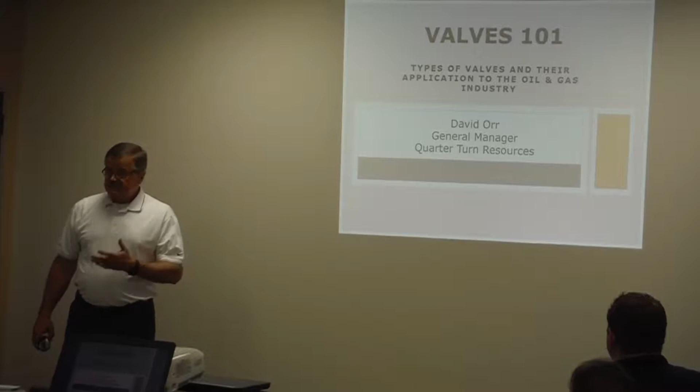So, basic information. I'll run through this fairly quickly, but this will give you a working knowledge of the basics of valves and pipelines, how valves work, and also the nomenclature about valves. So if you talk to people about them, you'll understand what needs to be done. What is a valve? Let's talk about a valve.

A valve is any device that stops, starts, or changes the direction or magnitude of any flow or pressure. I know that's a mouthful, that's an engineering term—some of you in here are engineers. But what it does is, you have a piece of pipe and things that flow through it.

I always like to use the analogy of a garden hose. You turn on your garden hose at home and water is going through there. Well, guess what you have at the end of that water hose? Your little thing you squirt water with—that's a valve. It gives you an idea of something you can control flow with, and that's what we're doing: start, stop, or change the magnitude of the flow.

And how do we do that? Again, with just the closure—the element in there that moves, that actually controls the flow of the media that goes through the valve.

We talk about basics—valves come in pressure classes. Some of you may be familiar with that. We'll start with what we call a class 150. If you see 150 with the little symbol at the end.

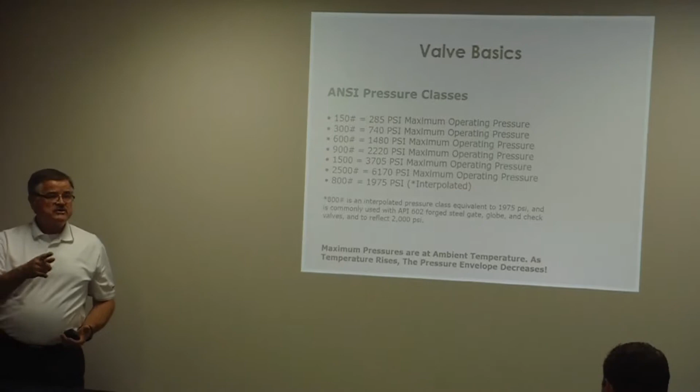Normally you'll see that when people talk about valves. If you read a valve spec or an RFQ, or somebody sends out a valve spec, they'll always tell us the class. What that designates is a standard throughout the industry—not just our valves, this would be anybody's valves. If you see the valve has a class, there's a maximum pressure.

They call it MAOP, maximum allowable operating pressure, that the valve is to be used at and comfortable with. So you've got 150 through 2500 here, and you can see the maximum pressure. I'm not going to bore you reading all this—you guys can read it, I hope.

So, the 800 class, you don't see very much anymore. You'll notice it's interpolated, but there used to also be a class 400. If you ever see out in the field, you may run across some older valves from the 50s and 60s. All of this was pretty much carried forward, and ANSI, the American National Standards Institute, adopted these standards in the 70s.

So you don't see much question about this anymore—most everybody's used to working with this, it's been close to 50 years now. So that's the way it works.

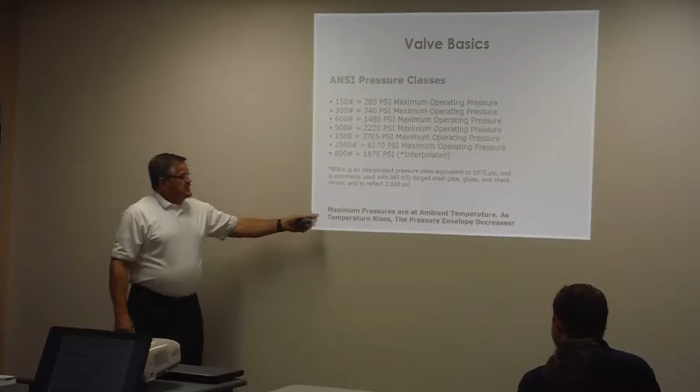But remember too, these pressures are not absolute. These pressures are at what we call ambient temperature. Ambient temperature—anybody know how that's measured? What is it? Anybody remember from your engineering training? The temperature of the environment—correct, the basic temperature of the environment.

We can talk about pretty much what that is: minus 20 to plus 100 is considered to be ambient temperature. That's the temperature of the atmosphere, pretty much.

So if we look at class—let's take class 600, a pretty popular valve pressure that we use in pipelines. When we look at class 600 here and go back to the ambient temperature, you notice the pressure rating is 1480. But what happens when things start to warm up and the valve is exposed to higher temperatures?

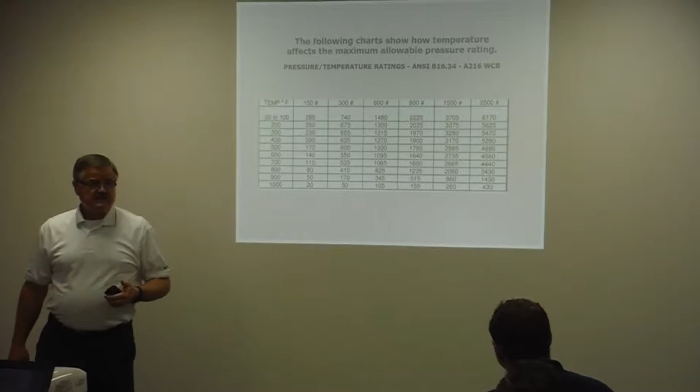If you'll notice, your pressure rating—when we get up to 500 degrees, the pressure rating drops to 1200. Why do you think that is? Anybody? What happens to metal when you heat it up? Right, it starts to get soft—it starts to soften, it loses some of its integrity. Now, it may not be enough to change the structure of it, but it does lose some of its pressure holding capabilities.

If you're ever involved with a situation, this is a lot of times we'll see in pipelines near a compressor station or a pumping station. Because what happens is as the pressure is increased, or the liquid temperature is increased through your pipeline, it runs through the pump, there's heat transfer, and then the media starts to get warm. So you have to take that into consideration. Also inside of a building, if you're somewhere where temperatures may be different. So it's just something to think about.

We've got it for every pressure class. And this is available. I mean, if you take that same 600 class valve and we get it to 1,000 degrees, look how much pressure it can hold.

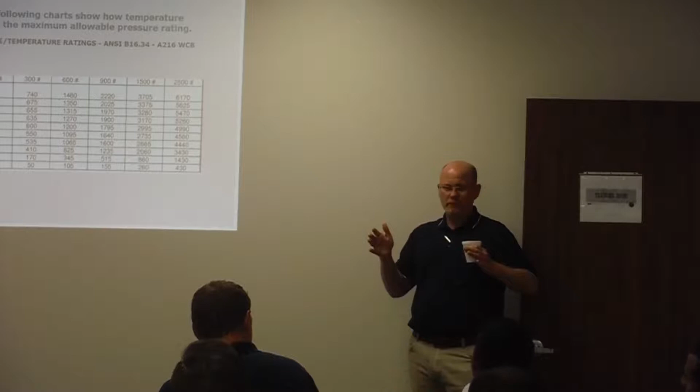Can I ask a question? Just real quick. So, are you all focused on, we talked briefly last week, are you all focused predominantly on pipeline? Oh okay, so you have wellhead. Anybody on the gas side where you deal with processing or anything like that?

Okay, so in gas, one of my nine lives as a valve guy, you get into gas processing and you're going through a mole sieve bed where you're drying the gas to get it to sales grade, put it into those molecular sieve dryers anywhere from 500 to 600 degrees Fahrenheit. Generally ANSI 600 class valves, and you're trying to hold that pressure in, so you isolate that bed so you can dry it out and run more gas.

So yeah, if you aren't exposed to it, talking about ANSI, this may be very rudimentary, but we're talking about ANSI standards here. These classifications of 150, 300, 600, 900, and they're associated with pressures. If you ever get upstream to the wellhead, 6A.

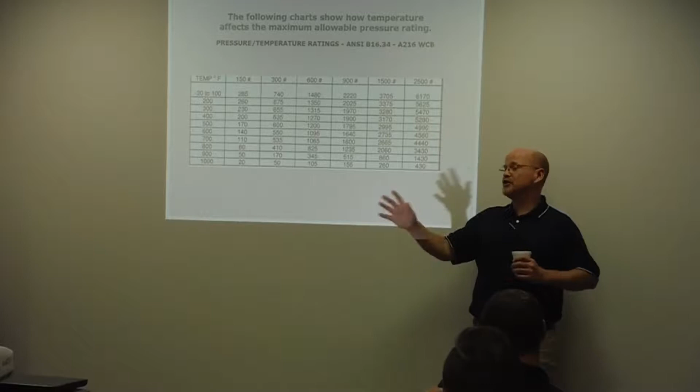You may not be talking about ANSI standards. No, you're talking about 6A pressure, 6A standard, and that's much easier in the sense, not easier to do, but in the sense that a 10,000-pound valve is going to hold how much pressure.

It's pretty simple. This is just a little bit more confusing, but so I understand exactly what we're doing, and that's why I would ask the question of where you're all from. Are you just pipeline? But even after this, if you go into a different area, this expands, but the 6A has the 2,000, 3,000, 5,000, 10,000, 15,000. So there are different standards.

Go ahead. Right, so again, just to make a reference to your kind of standards, so according to the pressure class, you mentioned like a regeneration there. At 600 degrees. So is there a correlation between temperature and pressure? Because at 600 degrees, higher temperature, if you're using like a 600 class pound ANSI valve, what's the correlation there between temperature and pressure?

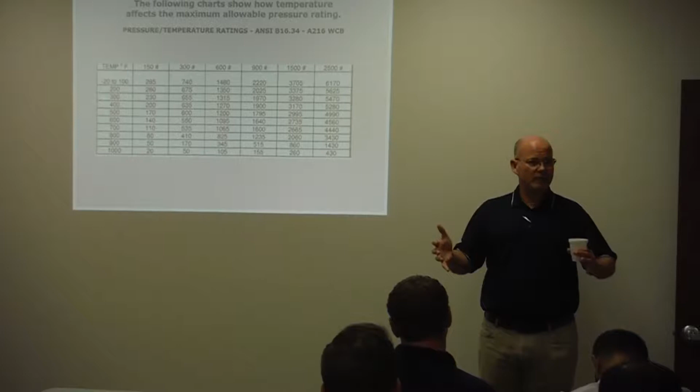Well, obviously, it's going to be the same correlation in the sense that if you use an ANSI 600 class valve in a dryer application that's rated, your maximum temperature in your dryer beds is, let's say, 600 Fahrenheit, your pressures through that dryer bed are going to have to be much lower. You're going to have to manage your pressures knowing that your temperature is at that rate. You're going to have to manage that knowing that your equipment is limited to this, right? Here's your box you have to live in. If you want to dry it at a higher temperature or a higher pressure, then you size that up and you put that dryer bed in an ANSI 900 class, which is not uncommon.

You know, the most common is 600 class, but you manage the equipment according to what your end results are. I don't know if that answered your question or not, but the pressure-temperature, we don't change the laws of physics, we just work around them. In the sense that you know that at 600 degrees Fahrenheit, a 600 class valve is at 1,095, that's your box you have to live in. Now, if you want to go to a higher temperature and it doesn't contain it, you size it up to 900 class.

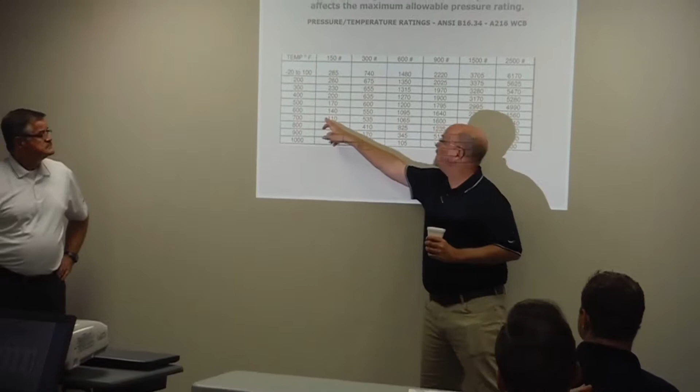Okay, and one of the things they're speaking to, you notice the pound sign behind each one of them. That's how you see it written, that's how they refer to the ANSI class valve. So the temperature at 600 degrees Fahrenheit, if you want to run higher pressures, there's your 900, max temperature at 600 degrees Fahrenheit.

He was talking more about the 6A valves and the correlation scale between 6A and ANSI. On the 6A valves, when you use a 10,000 6A valve and go to higher temps, you're already close to the limit. Do you therefore step that one up to the 15,000? It's going to be the same correlation. We don't change the laws of physics.

The metals are the same in a lot of cases, or you go to a different one. What determines that is the metals that are in there, and of course they also have ANSI flanges in a 600 class, 20-inch flange. You see this right here? This is what he's talking about. This is predicated on this line: ANSI B16.34 WCB. WCC will be a little bit different.

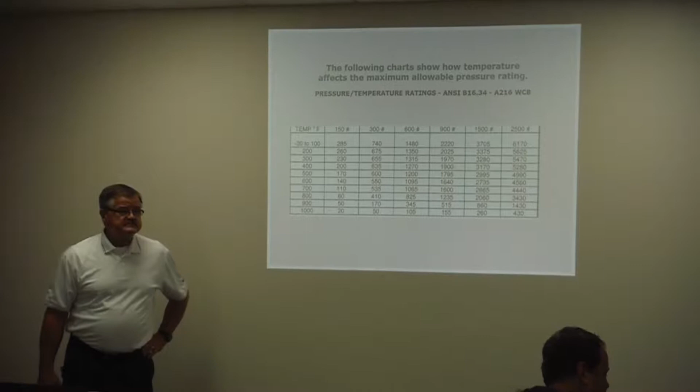If you use a stainless, this is going to change. If you use a super duplex, this is going to change. If you use a polyurethane valve, it's going to change. So are you talking about just the material of the ball itself? No, just the body, the pressure body, the pressure containing vessel. But that's your key, just one.

The 600 class, everybody refers to it as 600 class. When you're exchanging data with people, oftentimes that gets confused. Somebody will say, well, I've got 600 pounds, and then it starts sounding like that's your operating pressure, your media pressure inside. So when you're referring to this stuff, refer to the class, not necessarily the pound. ANSI standard, American National Standards Institute, B16.34 — this is your standard, and this is in the industry. So if you buy a 600-pound class valve from us or from anybody else, they're all the same standard.

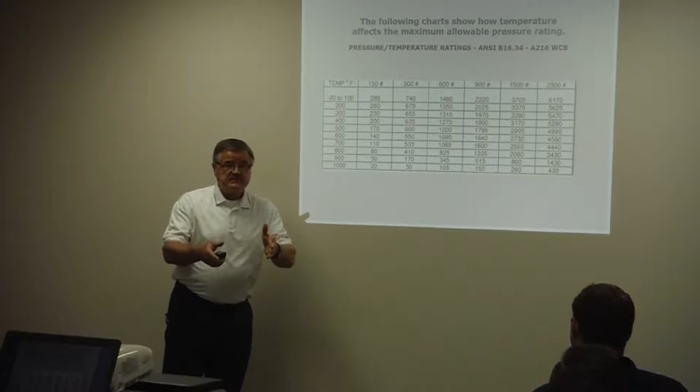The industry decided in the 70s to standardize on this, but you move into a different valve with different material. The WCB is steel, which would be a standard valve range here. The WCC would be a low temperature, probably go to -50, but then your maximum pressure rating is also derated. So pay attention to the specifications on the valve, but it depends on your project and your application. That's your key for doing it that way. Any other questions? Everybody good with that?

Okay, moving forward, let's talk about castings. We're going to talk about the two basic components of valves: one is casting, the second is forgings. Castings are very simple — what you do is take scrap metal, recycled metal or other types of metal, melt it, and pour it into a form, which allows the material to take the shape you particularly want.

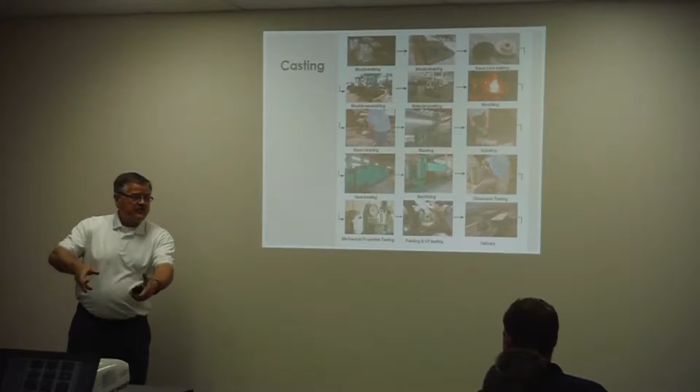They'll show what they call a core or a mold at the top center, then they put the molds together, melt the material, and pour it in. After it comes out, they clean it, blast it, grind it, heat treat it, machine it, do whatever, and check it to make sure everything's done. So that's a casting, and it's an inexpensive way to make valves, quite frankly. Castings have been around for probably over 700 or 800 years — if you've ever seen the old movies where they're making swords, they'll pour the molten material into an open type form, and it takes that shape.

Castings have been around forever. They have the advantage of being less expensive, but there's two issues with castings: number one is brittleness, and number two is porosity, which means the media inside can get out in particular cases. Now you can fix that, but if I lay a casting on the floor and hit it hard enough with a big enough hammer, it'll crack, maybe even break. So that's one of the downsides — depending on your application, there's a certain amount of brittleness. But they're a less expensive way to make valves, and every valve manufacturer uses castings in one form or another to make valves.

We talk about forgings, and this shows a press and shows this molten piece of material that's held in there. I'll give you guys the easiest example of a forging.

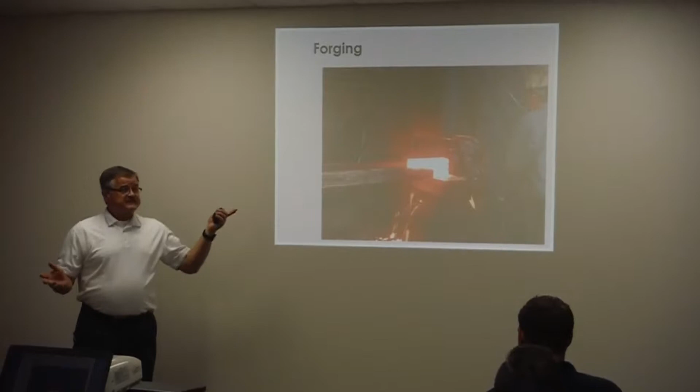How many of you have ever seen in person or seen in a movie how they make horseshoes? Stick them in the fire, get them cherry red, lay them on the anvil, and take a hammer. Whang, whang, whang. That's how they're making horseshoes. Quite frankly, it's a very simple way to talk about forging. That's how forgings are made.

The material gets into a semi-liquid state. It's melted to where it can be shaped, kind of like putty. And then it's usually pounded into a form or into a particular shape. They use presses, sometimes hydraulic, sometimes what they call hammers. They bring a ram up to the top and release it, and it goes bam! If you've ever been into a forging shop, they're hot, noisy, and something else to look at.

But this is an example of a forging. The plus side to a forging, think about what I said about casting. As material pours into a mold, it finds the spots to fill in. The molecules, when they cool, randomly line up. Within the material, if you can see it under a microscope, the grain kind of runs in all different directions. What happens is that you don't get a toughness. That's why they're brittle; they'll break because the molecules do not bond and form in what we call a very hard or tough form.

Secondly, when these molecules line up, if you have some type of impurity in there, grains of sand or whatever else, that also sets in there and the material doesn't fill that in, and then you have a little hole that goes through there. Some of you may have been involved where you actually see a casting that'll actually leak through the body.

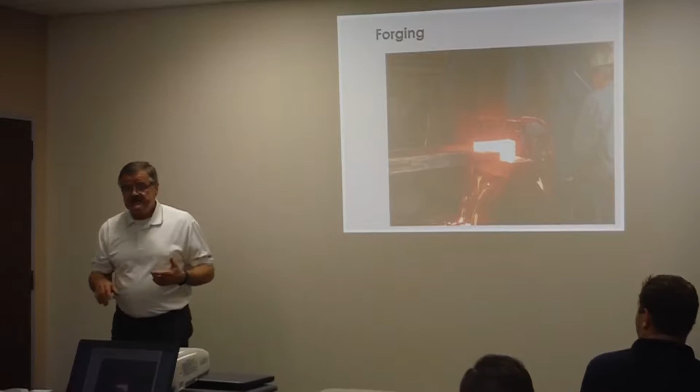Sometimes that happens. We can repair that, we weld it, but it's an issue that goes out there. Forgings, what happens is when you're applying pressure to the material, it forces the molecules to line up in a particular direction. They bond more securely. You don't find leaks through the bodies of forged valves. It just doesn't do that because the pressure requires every bit of that void inside the material to fill in.

That's why today on most pipelines, especially natural gas, the requirement for interstate pipelines - and this is by the Department of Transportation - is for forged valves. They want that extra level of assurance in keeping that material inside the pipeline.

So that's the difference between castings and forgings. Castings are cheaper, but we talk about porosity and brittleness. Forgings cost more because I've got to heat the material, I've got to have other equipment to beat it up, you know, form and shape it. But we don't have porosity and no brittle issues. So that's a lot of times the difference between forgings and castings. Questions on that? Run through that fairly quickly.

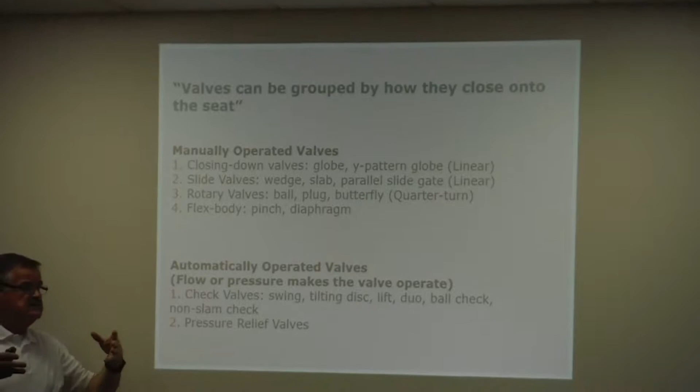Let's talk about groups of how valves are grouped by how they close on the seat. The seat is the sealing area of the valve. So we have two different kinds of valves. We have what are called manually operated valves - some type of outside influence, whether it's a hand or an operator that's put on the valve or a signal sent to the operator, something tells that valve to open and close. And then we have automatically operated valves, which are valves that don't require human intervention to actually open and close.

Manually, we've got globe valves, Y-pattern, and slide valves - wedge, slab, parallel slide gates. Kevin's going to talk about your wedge and gate valves today. Rotary valves - ball valves, plug valves, butterfly valves - and the flex body, which is normally used in valves that are for media that has a lot of solids in it. I've sold those actually to people in gravel pits when they wash gravel. So those things happen, but we don't normally deal with that in our particular industry.

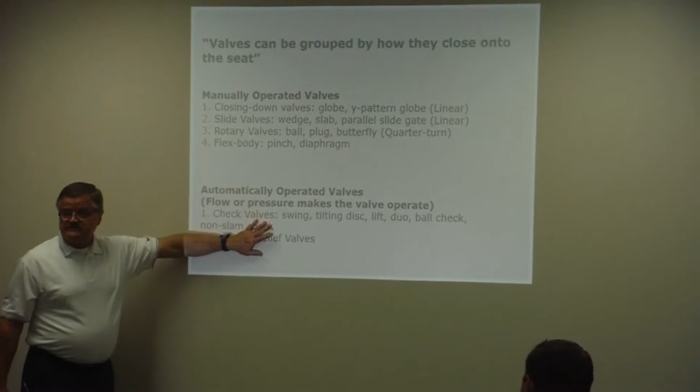Automatic valves, or check valves - swing, tilting disc, ball check, non-slam - and the biggest one that you see is pressure relief valves. They don't require human intervention to work. They're designed to work automatically. So again, manual valves, automatic valves. Question? All right, moving on.

A CV factor - everybody know what CV factor is? Yes, no? Okay, CV - engineering terms, coefficient of volume. Amount of gallons per minute of water, that's how a valve is rated, by water flow, flowing past the valve, required to create enough friction to lose 1 psi of pressure, which means pressure drop.

Easy way to remember that is remember your squirter on the end of your garden hose? If you take that off, guess what you got? Turn the spigot on, you got a full flow of water, right? You put that spigot back on there, and then you're moving your handle or twisting something.

What you're doing is you're creating what's called a pressure drop. How many of you have ever had the opportunity, especially guys, washing a car and you couldn't find your thing that goes on the end of the hose, so you put a kink in the hose and hold it, right? What happens when you first start to open that? You get a lot of high pressure, right? And as you open that hose up, your pressure drops, but your volume increases.

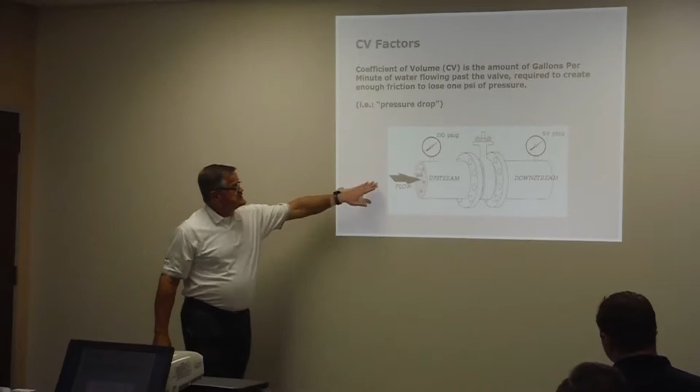That's a restriction. So what we want to do is we have flow here into a valve. This is representative of a butterfly valve. Anything that's in that flow path is going to slow down that flow through there. So what you measure is what we call pressure drop. You gauge here, and through your closure element, you see how much pressure drop you have there.

We'll talk more about how that applies in valves, but CV factor. If I have a valve, let's take this ball valve here. That's why we brought this, easy to show. You can see through this ball valve, and this is the same diameter as a pipe, right? So how much CV drop do I have through this valve when it's fully open? Anybody guess? What's my pressure drop on this valve?

There's none, technically speaking, because when the valve's completely open... of course when I partially close the valve, now I'm creating a pressure drop. I'm restricting flow. So what would be the CV factor on this valve when it's fully open? Anybody want to guess? Come on, remember your basic math. Virtually none. It's called 1. A perfect CV factor, where there's no restriction of flow and no pressure drop, is a CV factor of 1.

Once I start to close this valve, now my CV factor may be 0.85, 0.80. So again, CV factor is critical, because if you're designing or working within a pipeline, you've got to put product in the front end of that pipeline, and you've got to be able to tell people what's going to come out the back end of that pipe. If I have a full open valve, the same pressure I put in, the product should be the same I get out.

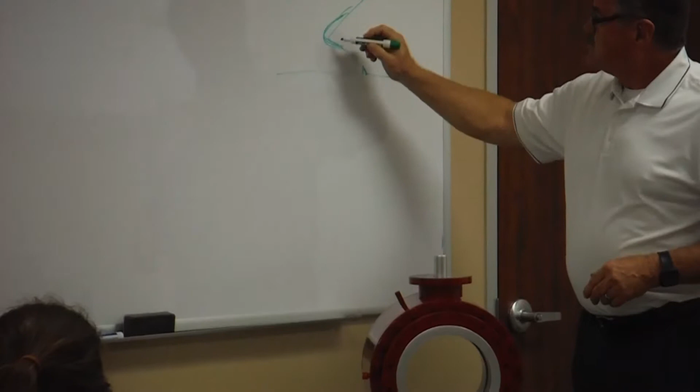Because remember, when you look at your profile through your pipeline - here's a little bit, this is your pipeline - because of your friction here, your flow profile looks like this going through a pipeline with liquids, right? That's what you got to do. So when you measure flow in a pipeline and talk about your valves, where are you going to measure? You're not going to measure your flow here at the wall. You're going to measure your flow in the center. Okay, basic to cover with that, but that's just basic engineering.

So we talk about CV factor and how that CV factor works. It's critical when you're doing calculations, and also with valves, because we have valves that are like this - this is called a full open valve. But you can also buy valves where the port through the ball in the center of the valve is actually smaller, then you create your own pressure drop. In certain valves, we'll talk about plug valves today - plug valves have a smaller opening through the valve than the pipe itself, so it creates this CV factor and pressure drop.

So, the terms for that - that's a full port. This is a full port or full open valve. If you have a reduced port, that's when the hole through the ball is actually smaller than the inlet and outlet side of the valve here. Okay?

Uncommon types of valves. And this is a little bit of a misnomer. Gates and globes. We don't see too many globes, quite frankly, especially in pipelines. We do see gates, but gates is more liquids. I had designed this basically for gas, so my apology for that. We will talk about gate valves. The gate valves will be more into your liquid side.

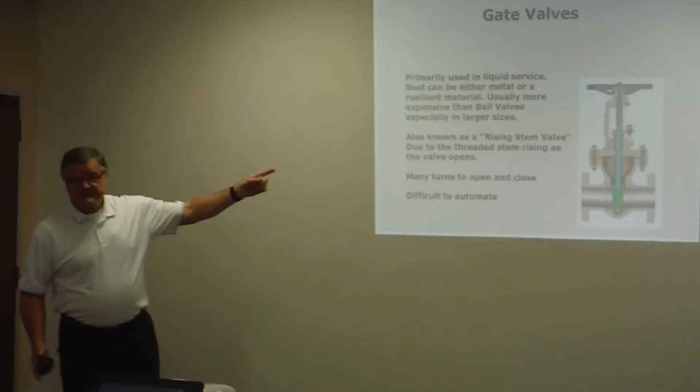Okay, so uncommon. A gate valve, again, liquid service. The seat can be metal or resilient material. Usually more expensive than a ball valve, especially in the larger diameters. But sometimes that's what you use. Rising stem valve. I'll show you in another valve, another situation. This is the oldest design valve in history. We'll talk about that in just a few minutes.

Rising stem valve, threaded stem. A lot of times your old manual valves had a hand wheel on like this out in the field. If you rode by it, you could see the valve. You see a bunch of threaded stems sticking up out of the top of the handle. Usually meant the valve was open, because as you screw that handle, it pulls the gate up out of the valve.

If you went by and saw just a little bit of the threaded rod on top of that valve, usually meant the gate was closed. So a lot of times you can visually see those. Many turns open and closed. Sometimes they can be difficult to automate, mostly with electric actuators to do that.

A bolted bonnet globe valve. These are also used somewhat in liquid service. You may see these. Are you familiar with the faucet on the outside of your house where you turn the water off and on? That's what that is, believe it or not. Your material flows in this way. This is a resiliency or an O-ring.

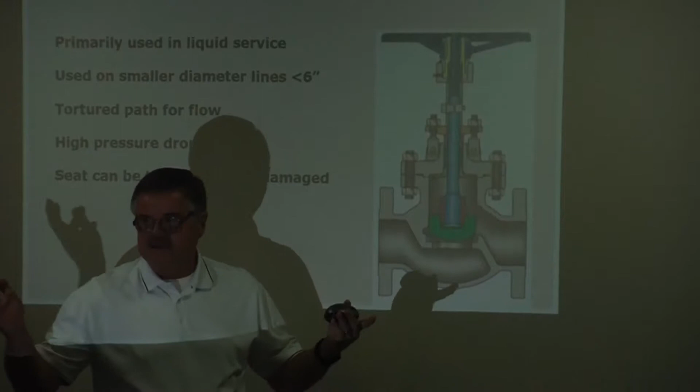And what happens is you turn your spigot on the side. I'm sorry, I call it spigot. But you pull that. What you do is you pull this off, so your liquid starts to flow past the seat and then flow out of the valve. And when you look at your faucet on the outside of your house, that's what you have. This is also usually your kitchen faucet, especially if they had the old type. They had the two handles, one for hot water, one for cold.

What you have is basic design. This valve design has been around for over 200 years. Pretty basic too. The downside to this a lot of times is you continue to lock down the seat. Whatever this material is usually takes what we call a set. It starts to form into the seat. And then it starts to take a set, and you have to keep cranking it down a little tighter and a little tighter. And eventually your seat gets to the point it won't seal anymore, and then you got to replace it, or you got to replace the valve. But it's a pretty common valve with that.

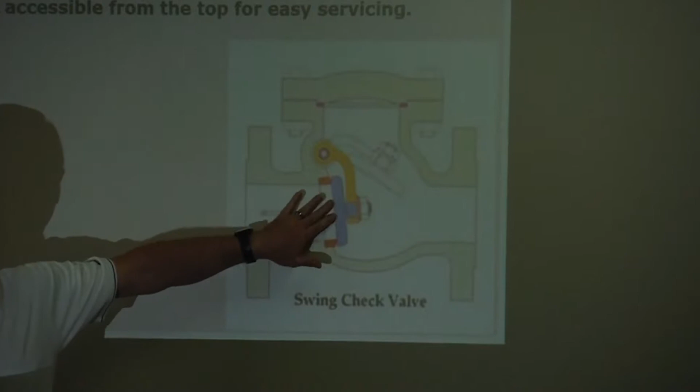Okay. Swing checks. We see a lot of these with what's going on out here. With what we deal with, it's normally 2-inch to 36-inch in the API sizes, all the way up to class 600s. The nice thing about this particular check valve, this is your flow, and it has what we call a clapper right here. So as your flow goes in, if this flapper is at a slight angle, it pushes this flapper up and allows your flow to go through the valve. Well, what happens when the flow reverses? Your clapper comes down and closes off, and your material can only go one way.

Pipelines, especially around pumping stations or compressor stations, real critical. If you have a pump that pumps things out one way, you don't want the material to start pushing that pump back the other way. That's how things get damaged. So what we do with the check valve is it's called a directional valve. It's a one-way flow. So you see those in pipelines quite a bit, whether it's gas or liquids. That'll actually come in when I talk later. There are directional valves, and

the standards by which to manufacture a valve are the API and ANSI standards. You know, it has to be this thick, the face has to be this long. Directional valves will have an arrow on them. I know, I say that and it seems rudimentary. You'd be surprised how many times I went out there and they put check valves in the wrong direction.

Sometimes we get up on the wrong side of the bed and we're not thinking when we do something.

But when I talk about our valves, there are directional valves where it is only one direction. There's also a term called bidirectional. We'll cover that in a minute. But there's also a thing called preferred pressure direction, and we'll explain that as well, okay? But there's a clear delineation. It's kind of like we were talking about a minute ago.

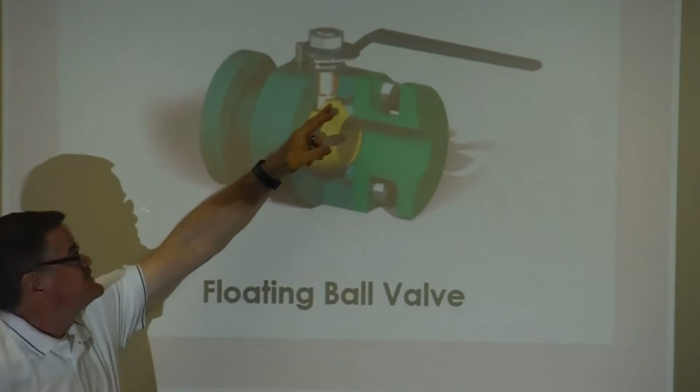Gas side, but also liquids, you see a lot of ball valves. And this is a ball valve. In basic design, there's two types. First and foremost is what's called a floating ball valve. Usually this is smaller diameters, and the reason they call them floating is that there's a groove in the top of this, which attaches to the valve stem, but there's nothing on the bottom.

The seats you see here and here are fixed in the valve. So when you close that valve, the ball actually travels a slight distance and is pushed into the seat to create the seal. So the ball actually floats back and forth between the seats. Seats being fixed, the ball moves. Okay? That's a standard, and everybody calls them floating ball valves.

You normally see these in small diameters, 2, 3, and 4 inch. It's rare you see much bigger than that, and you rarely see them above 300 class. You get to 600 class and larger, you don't see floating ball valves. People just don't use them. But they're inexpensive. They're pretty cheap to make because the tolerances to allow for the seats are pretty wide open. Pretty easy to seal off the valve. So a lot of people use them in lower pressure, smaller pipe diameters.

The trunnion mounted ball valve is one of the preferreds in the pipeline. This is a trunnion mounted ball valve. We have a cutaway on this side of the valve. It's very simple to see. Well, take it apart and see it. It's a lot easier to do it that way. There is a bearing block and a bearing block, and we'll see one of these today on our plant tour. We've got one taken apart so you can see it in more detail.

But what happens is that instead of this ball floating around inside there, the ball is contained between the top and bottom trunnion mount. There's a hole through each one of these in a way that the ball is trapped. So the ball can never move. The ball pivots on an axis. If you draw a straight line from the bottom to the top of this valve in the center, the ball pivots on the axis.

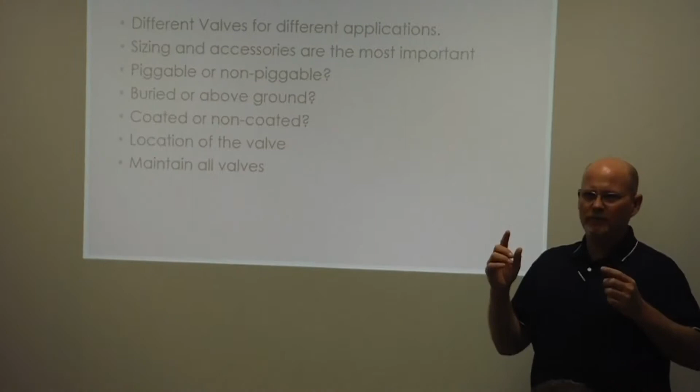The difference in the floating ball valve and the trunnion ball valve: in a floating ball valve, if you have that mass of metal, it's difficult to turn, but then you close it and add pressure at 600 psi, and you're trying to break that ball off of that seat, it becomes cost prohibitive. You can't buy a gear big enough, or an operator big enough, or you don't want to pay for it, because there's so much pressure driving the ball into the downstream seat, because it's floating. And the way you're going to learn is when you have been exposed to someone making a bad decision.

I learned the difference in trunnion and floating ball valves. I was part of a group that started our own company many years ago, and this is how I learned. We sold our first valve to Enbridge. It was in a gas processing facility, and we were putting an actuator on a 6-inch 600 valve. The reason I'm familiar with molecular sieve drying is because that's my background. Started many years ago with a little company called Orbit. Spent about 18 years with them. They kind of own that world.

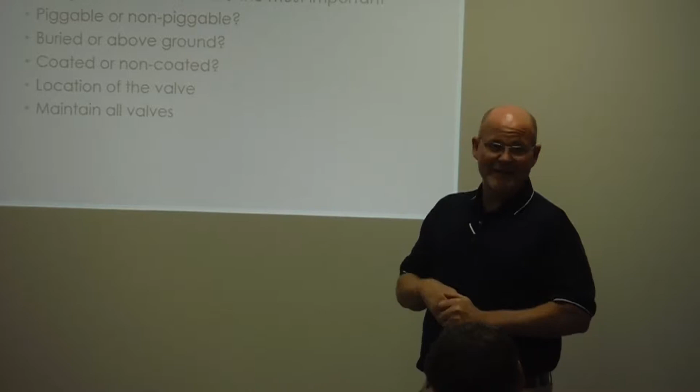But we were building a competitive valve, and this 6-inch 600 and a floating, I was very familiar with what our torques were, and I put this together, and the engineer goes, well, probably want to do this, that, and the other. And I said, no, this will work, right? So we put that in there, and we added pressure, couldn't operate the valve. I screwed up, right? Went back to my design engineer, and he said, well, we need to make that a trunnion.

The difference in the foot-pounds of torque required to turn a full-ported 6-inch 600, in this instance. This is not across the board, but it's a good example. 6-inch 600 floater, full-port at 600 degrees Fahrenheit, 1,000 psi, give or take, versus a trunnion. This was a third of the torque required, literally. So your actuator sizing went from 4 Dodge trucks to a Miata. Put the valve in, worked beautifully, they started using them. But that's the advantage: mass is one thing, but when you add pressure, it's a whole different ballgame. So, sorry.

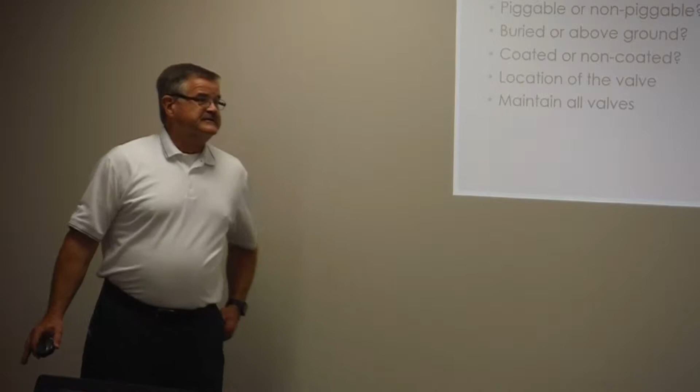All right. So again, as I said in my earlier statement, floating ball valves you normally see in lower pressures and smaller sizes. Trunnions, larger valves, higher pressures. Quite frankly, I don't know that I have ever seen an actual in-operation 600 class floating ball valve. It's rare. But in your world, yeah. We come from different worlds. You go into a power plant, it's got 30s and 36 inch, and they can't take them out.

Anyway, there's a couple of customers who have some old Rockwell-built 30 and 36 inch 600 class floating ball valves, and they have the largest actuators in the world to turn them, because they're operating up at about 800 psi. There's so much pressure on these things, and they want to get them out, but they're critical valves. They have to shut their system down to do it. Tell them good luck trying to find a replacement exactly like that.

Look, I try not to be one of those who says it's never gonna happen, right? In every industry there are exceptions, and there are companies out there that only build floating ball valves up to 2500 class because of the application, because you can't build a metal seated trunnion ball valve to get the seal that you need in severe service. There are companies like Mogas and ValvTechnologies, and these people cut their teeth on that. What we do is simple. These people are running rocks and steam, so there's exceptions to every rule.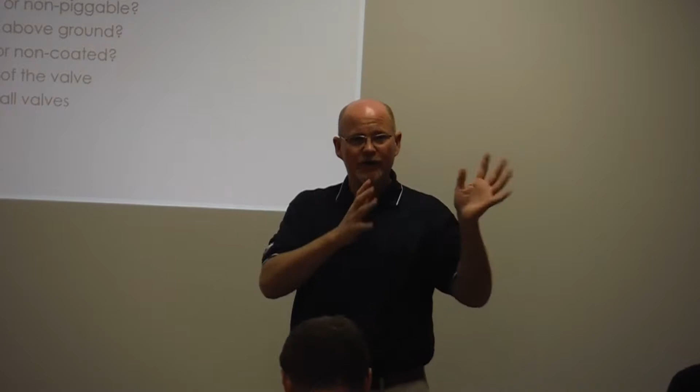There are small niches in this industry, and yes, there are big metal-seated floating ball valves, but in that industry, you can't do what they do with their design with ours. Ours is soft seat, resilient seated. It's designed for up to 250 degrees Fahrenheit. These things go to 1400 F.

It's different. There are exceptions to every rule, but they're out there. In our world, your current world, that's a general guideline. What David is saying is right. Most of your floating ball valves are lower pressure, smaller diameter. It's more advantageous for you to look at a trend, and then you get to a certain size, certain pressure.

So if you use a trunnion ball valve for isolation, for instance, is there a kind of requirement for a minimum differential pressure, like if you want to go by the size? Because on one end there's zero pressure because you're using it for isolation, and on the other end there's energy. So is there like a required differential pressure, or can you just slowly open that valve?

Going back to size - in a trunnion ball valve, depending on your seating systems, the differential pressure isn't that critical. The valve will operate, right? It's going to open once you get enough energy on top of the actuator.

The issues with opening against a high differential, especially in a resilient seated valve, is what's it going to do to your seating area? So I may not understand your question, but in terms of opening that valve under that differential - that's going to be a policy you set internally. Will the valve operate under it? Sure. But there are considerations.

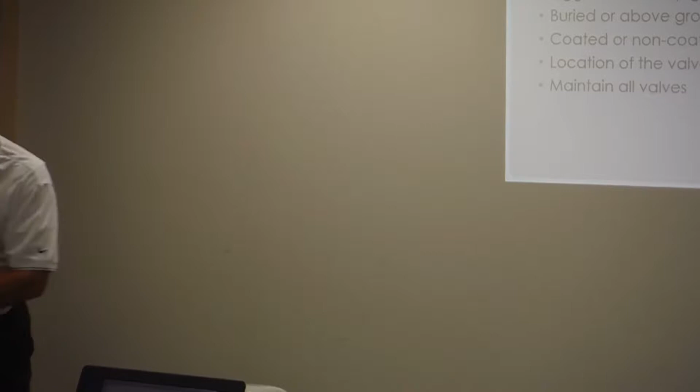Because the longer you sit there with that valve partially open - what happens again when you partially open this valve, imagine when it's fully open, this entire seating area is behind the ball, because the ball covers the entire seating arrangement. But if you open the valve partially, say if the ball is here and it starts to open here, this is the area that's exposed in the downstream seat - what happens is that rush of material starts to eat away and erode the seat.

And the more you do that at, say, 3 o'clock, that area is going to be sacrificial - right there on that face of that seat. That's where I was getting at - it's a sacrificial element, that's inherent in the design. That happens with what's called erosion in our nomenclature - it erodes away the seat, because whatever material you're flowing through there, whether it's a gas or liquid or anything, there's a certain amount of abrasion that happens with that seat being exposed.

So that's why in a lot of what we call control valves, where they modulate it and keep the pressure or volume at a particular flow rate, sometimes you won't find a resilient seat. You may find a harder seat, a metal seat or something that can handle that better, at a quicker or lower flow rate. But in your situation, I'd recommend going from full close to full open as quickly and as safely as possible, because you want to minimize how that seat is exposed to the flow stream. Does that make sense? That's the easiest way to do that.

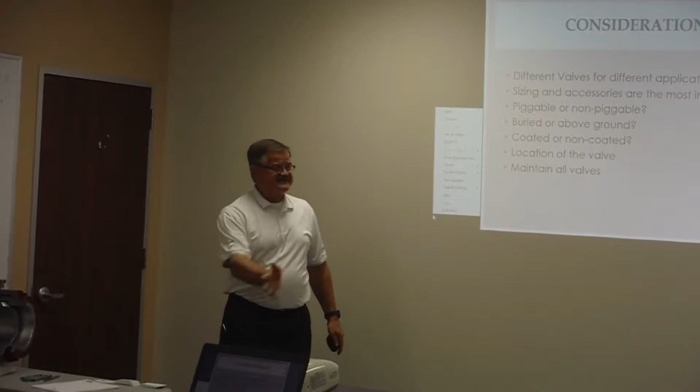Everybody know what pigging means? Okay, I have a question about pigging I've never gotten a right answer to. Do they call it a pig because it gets nasty, or because of the noise it makes going through the pipeline—because it squeaks? Yeah, noise. If you've ever been near a pipeline you hear them squeal as they go by, the scrapers catching everything. I thought it might have been because they got so nasty looking.

Is the valve for buried service, because a lot of pipelines are buried, or is it above ground? That's a consideration too, we'll talk about that later. Coated or non-coated is the finish on the outside of the valve—if you're going to bury it, you've got to have a certain coating. If it's above ground, I'll ride by, and if it looks rough we'll go blast the paint off and repaint it, make it pretty again. So that's a consideration: where's the valve located? Is it in a remote area five miles from the nearest power source, or inside a building at a compressor station? It makes a difference on the application of the valve.

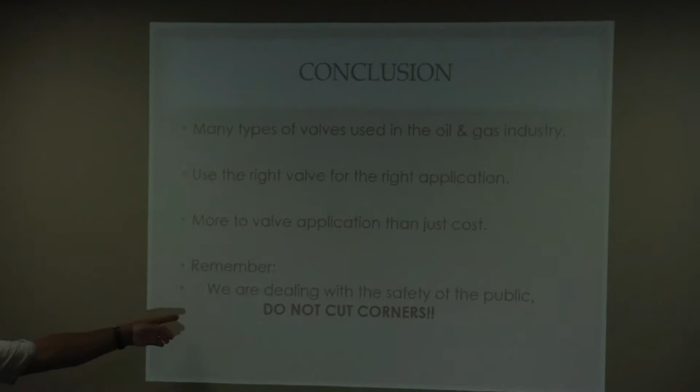Bottom line: maintain all your valves. Make sure you get the best life and service out of any valve by maintaining it, okay? Many types of valves are used in oil and gas—use the right one. There's more to valve application than just cost. And at the end of the day, we're dealing with public safety here, guys. We don't cut corners, period.

I could talk about San Bruno, for any of you who've heard of that out in California, or the wildfires last year in California. The one example I can give you quickly: I was working for another valve company and got a phone call about 6 a.m. one morning. This happened in eastern Tennessee—East Tennessee Natural Gas had a compressor station, and at about 6 a.m. an F2 tornado went right through the middle of it. It cut a path about 100 yards wide right through the center of the compressor station. You can imagine what that looked like. They were calling us saying, how do we shut this thing down? They had to go find a valve three miles upstream from the compressor plant. It wasn't automated—a guy had to go out there with a gear operator on top of that valve, and 220 turns later he got the gas shut off. But it happens, and again, we can't control weather and nature. But again, safety, okay?

Again, that was Valve 101 where we just talked about basic things. Any questions? I do have one.

Typically we use forged valves a lot in natural gas. Forged valves—is that a requirement? Yes, pretty much, in interstate pipelines. So what's the largest size coming in, or maybe it's small sizes now? In the United States there's a very, very small section of 48-inch valves. The majority of pipelines in the United States are either 24-inch to 42-inch—that's pretty standard. You'll see a little bit of 20-inch, most of that being laterals that go off the main pipeline and feed other areas. But 24 through 42 is probably 97% of pipelines in the U.S. There's a very small part larger, in the 48-inch range, but I doubt there's even a few hundred miles of it.

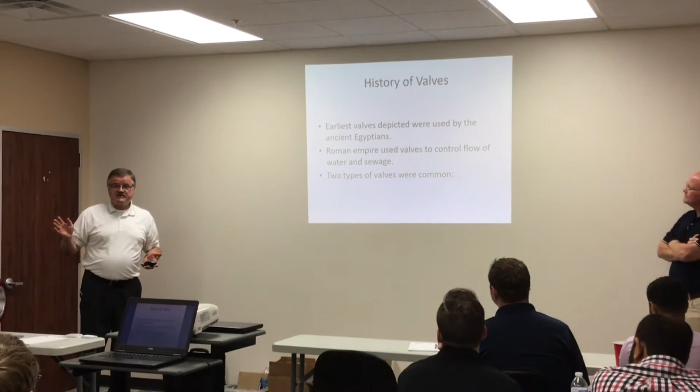The earliest valves depicted were used by the ancient Egyptians. Did you know that? Just because today we have modern technology, cell phones and computers, doesn't mean we're always the smartest people in the world. Valves have been around a long time. The Romans used valves to control the flow of water and sewage. The first one was a gate valve—they used to put these in fields coming off the river, digging a trench and putting in what they call a sluice gate valve, so they could open and close it to water their fields. This has been depicted almost 4,000 years ago.

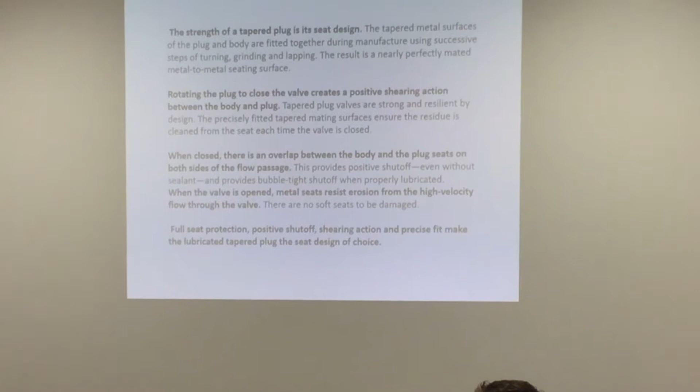Again, this is a lot of nomenclature out of a catalog, but it talks about tapered plug. You have a tapered plug that goes inside a tapered body. The more pressure you push down on that, the tighter the seal becomes. Rotating the plug creates a shearing action which cuts off your flow completely. There's overlap between the plug and the plug seat, so you get seat protection and positive shut off.

Okay, a lot of this is sales talk, I'm going to move through this fairly quickly. If you want a copy of this or need more detail, if you're dealing in plug valves, let me know and we'll deal with that. Basic construction: tapered plug, tapered body. The deeper this plug pushes into the body, the tighter it fits, the tighter your seal. That's how that particular plug valve works.

In the 1950s, because of higher pressures throughout the oil and gas industry, they decided to take the plug away from the stem and invert it, turn it over, so the taper now runs the other way. That handled the higher pressures and allowed the plug to turn more freely inside the valve. So today that's your pretty standard design, a pressure balanced design. It reduces the torque and works better for applications today.

A pressure balanced plug is installed with high pressure drop. You might say, where are these commonly used? Two applications that you see plug valves being used on today, and you'll use the second one in your liquid lines. The first one is called blowdown. Now you don't blow down liquid pipelines, that doesn't work, but in natural gas pipelines you can do that.

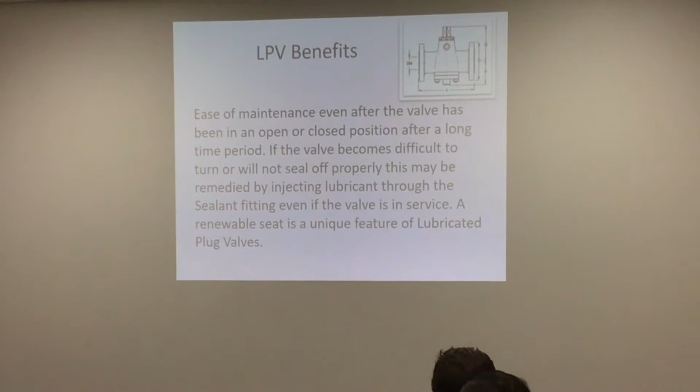We talked about the way we balance the plug, top and bottom, so that we keep the torque down on the valve. Liquid, what do they do? Their maintenance, they can be serviced in line. You can inject a sealant into the valve, usually with a high pressure grease gun or a NAT gun. That's how you put sealant inside the valve to do that.

Okay, valve sealants - I'll run through this fairly quickly. You use different sealants for different applications. They're a lot used in oil and gas. When I sold plug valves at Nordstrom, we actually had a sealant that was food grade - you could eat it. But it was designed for applications where they used pure water or other things like that. So again, right valve, right application. For plug valves, lubricated plug valves with the right sealant to fit the application - that's the key for that.

Many of those are made. Sealant fittings are designed to maintain the pressure, and the check valve's installed in the port. I'm going to move on.

Quite frankly, if you've ever been around a gas pipeline when they do the blowdown, it's worse than a jet engine taking off and you're standing 50 feet from it. It blows and blows and it's noisy. But again, with natural gas, the plus side is you can relieve that pressure to atmosphere. Of course, today in liquid petroleum product, we do not talk about anything touching the ground. We don't want EPA calling us and saying what's going on. But that's something that a plug valve is used for.

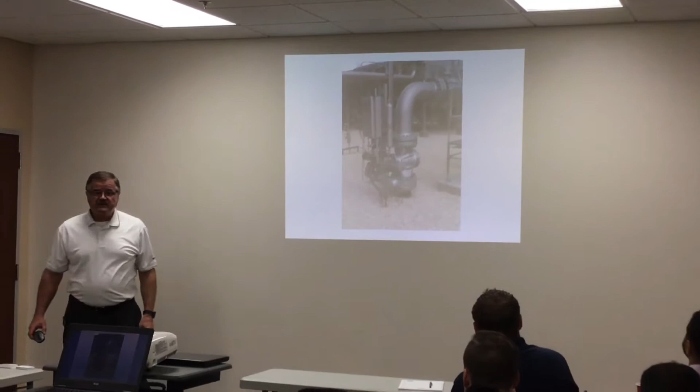Here shows an automated plug valve. This is an operator mounted. This is a plug valve mounted in this header. Goes up, and interestingly, there's a manual ball valve at the top of it. This is down in Florida, at a compressor station, which is similar to a pumping station, which you guys will be familiar with. This was a gas over oil high pressure operator that would open and close that plug valve. That's Florida Gas, by the way, for you guys in the back.

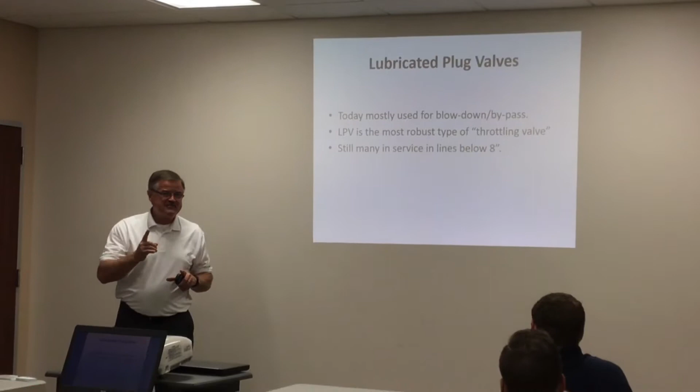And a plug valve is a reduced port valve. That means that the port going through the valve is smaller than the pipeline. Can you pig a plug valve? Once. Then you go open a pipeline and try to drag the pig back out of the valve, right? That's the only way you can do that.

Many years of service, again, these have been installed for the gas industry. They were standards all the way up to the 1970s. Even in low pressure gas, that old cast iron valve I showed you to start with, prior to the polyethylene valve that came out in the 80s, that was the standard valve used in the gas business, especially low pressure gas in cities. Today, of course, polyethylene takes its place in almost all of that. Maintenance is a key for plug valves.

Move on with that. Questions? Up there, I kind of started my own deal with 5 other partners. We started a valve that would compete with Orbit and did fairly well over about 5 years. Life changes. Y'all will learn that eventually as you get older and things happen. And I needed to get off of the road because I was spending a lot of time on the road getting this new startup up and running. And in 5 years, we grew it from 0 to about 9 million. Brand new valve, new patent, new concept. So it was fun, that's what I like doing, growing new stuff.

Needed to stop, needed to just be in Houston to raise my two boys. So I started with a company called M&J Valve. I don't know if y'all have heard of them before. They build some big bore gate valves. You know, no, they're a premier gate valve. There's three premier gate valve manufacturers in the world, and you need to know who they are. Schlumberger owns Cameron, who owns WKM.

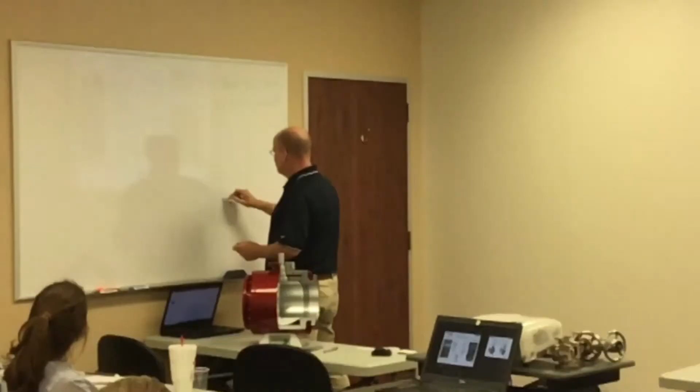We'll get to this eventually, but think about a wedge gate valve. You've got a wedge gate valve, you've got your body, the slight taper, seats, you've got your wedge that is designed to fit in between those. It's basically your tapered plug, except it's on a rising and lowering, and sometimes they're sharp if you need them to cut. Again, valve for its application.

Well, this wedge gate valve, when you pull this wedge of this gate up above this top seat, and you've got your valve body here, you've got this expanse in between these seats. As if you were pigging through this valve, that pig would experience that void. Okay? So that could be a full port valve. It could be 12 inches all the way through, but it's not through conduit, because when that gate pulls up, you've got a void.

So full port is full port. Through conduit can be full port. Full port does not necessarily mean through conduit. You can have full port and have a cavity in there. So if that span is far enough and that pig doesn't have enough inertia and it drops, you got a stuck pig. Okay, so piggable and through conduit mean the same things. Piggable and full port don't always mean the same things. Right? Everybody got that? Very, very simple, but I have been, again, it's one of those things where you've learned.

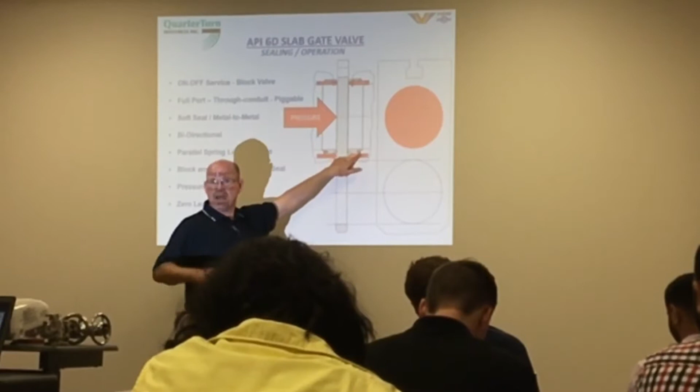So, how does a slab gate valve seal? In the closed position, similar to a ball valve, you've closed your gate, and you have a series of springs around the outside of the diameter of the seat, behind the seat. That helps energize and keep a constant pressure on the surface of the gate, even in the full open or full closed position. But when it goes into the fully closed position, you've got the pressure in your pipeline against that gate, against the downstream seat, and a crevice, an area behind this seat, that pressure energizes there and energizes that seat against the upstream side.

Okay, so it's a pressure sealing valve. This is a bidirectional valve. Doesn't matter which direction you put it in, it's going to operate the same way. The gate is similar to a floating ball valve, in that the gate is not statically pinned at the bottom or at the top to the stem. It literally has what we call a T-handle and a slot right here at the top of this. So that just slides in there, and it allows that gate to move depending on your pressure and your direction. It will float one direction or the other, completely bidirectional.

Earlier I interrupted David briefly, and I talked about how you've got directional valves, like a check valve, and you have bidirectional valves. But there sometimes people use the term with the preferred pressure end, okay?

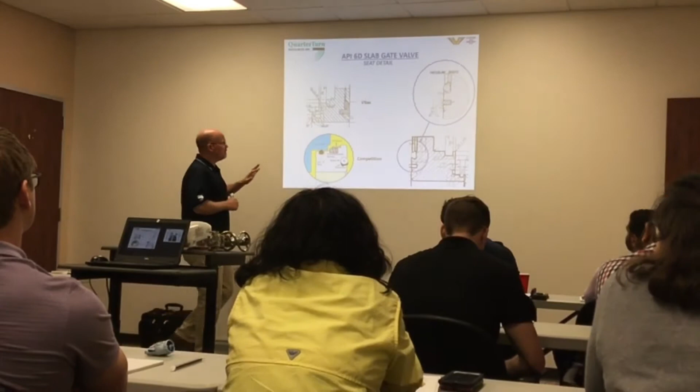Okay, so slab, different people use different things in their designs. The primary competition uses a series of nylon and Vitons that's encapsulated inside the seat base. We use a very similar design of a nylon and a Viton material, just a little bit different form, same function, same spring system behind it.

But what happens, like I said, is this is one of the seats on the valve. When the valve comes into the closed position, the gate is in contact with the resilient material. Pressure, if it's in this direction, pushes against the gate, against this exact seat downstream, and then pressure will be behind this, creating a piston effect against that seat, against the gate, affecting your upstream seal.

So the beauty about the gate valve is when you shut this gate, you have trapped fluid or media in the body, and you can bleed that body — double block and bleed.

So when this gate goes to the closed position, you have product here at lower pressure, media in the body, and you can go on the outside of it with a manual bleed valve at the highest point.

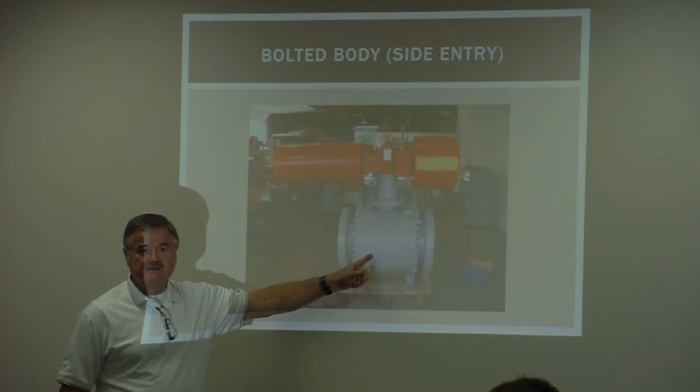A bolted body — this shows a picture of a bolted body design. Pretty simple to see; this is a flange by flange valve. Everybody understands the difference between flanged in and weld in. The body is three pieces: you have what's called your closure or your ends, and then you have the main center section where the ball and all the seats and everything goes into the valve. If you'll notice, you see the bolts on either side.

This is my model here. You can see it is a bolted body design. That means that the valve is bolted together. It's also called side entry, which means, in nomenclature, that you can literally, when it's mounted, get in the side of the valve. So that's what's meant by a bolted body valve.

So this is what you have with a bolted body design. Pretty simple how they put that together.

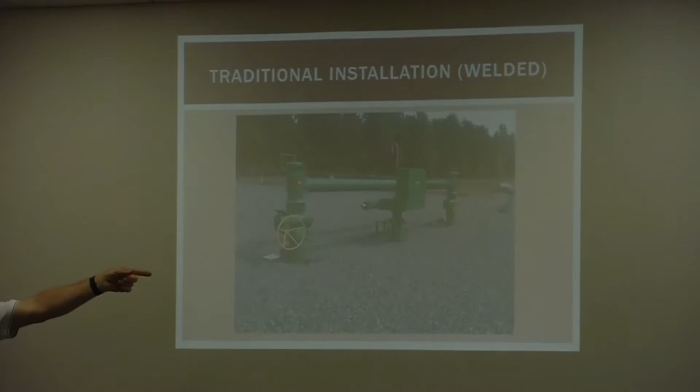We talked about, showed you this picture before, the buried welded body is in the ground. Now why, you would say, what would be traditional about that? Anybody want to say why you would have a bolted body versus a welded body? Do you know why? We need a different process — a different process of what's going through it? No, the valve doesn't care.

You run the same materials through both valves. The biggest thing is a bolted body valve, in a traditional sense, is used in above ground applications. If you have a valve that's above grade, in most cases—not all, there's always exceptions—but as a rule of thumb, a bolted body valve is used above grade.

You know why? People don't want to bury flanges. They don't want those buried in the ground. It's repairable. When everything's welded together, if the valve has an internal problem, I have to cut it apart to work on it. If it's a bolted body, I can disassemble the valve and repair it.

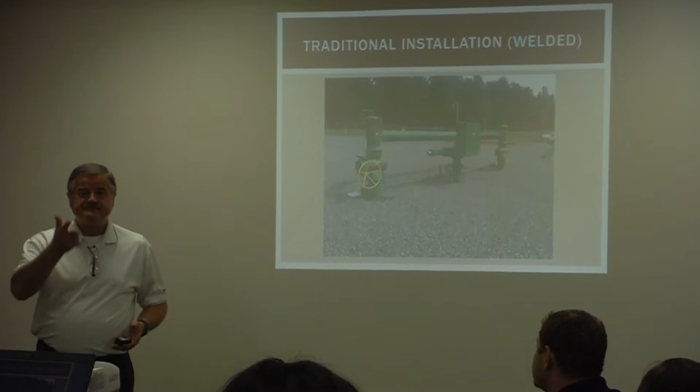So traditional installation for an all-welded body, where you don't put any flanges, is below grade—everything's welded up. Do you ever have to choose between bolted and welded depending on the materials used, like casting, forged, or pipeline? No, all these are forged valves, different materials, doesn't matter. It only has to do with the way the body is put together—either bolted together or welded together. Everything else is the same.

So everybody with gas pipeline applications, raise your hand, I guess. Yes, you'll have new projects, expansions, that sort of thing.

It's really important—an all-welded body, you cannot take them apart. It is what it is. We used to call them throwaway valves in the old days when we built nothing but bolted body. But it's really critical that when you put those things out there, you take care of the integrity of the valve, particularly if you're putting it underground, and protect it from getting anything inside, because you can't pull it apart or repair scratched balls and that sort of thing. So it's really important on your projects that you keep the cleanliness before you put it in, and ensure it goes in without getting a lot of stuff in it.

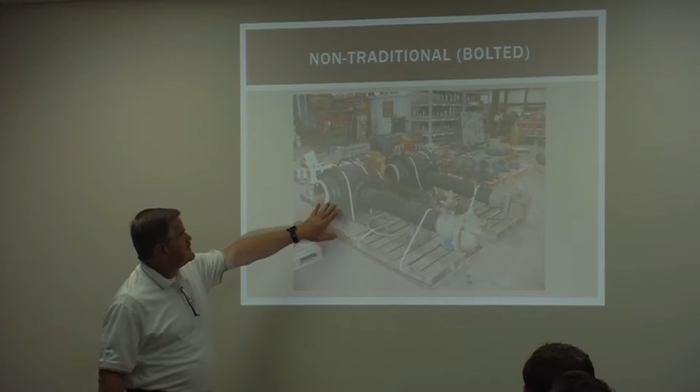This has what we call a stem extension—sometimes called a high head extension—because this is a buried valve. If you'll notice, it's black up to this point. When this valve is installed, about this much of it is all that's going to be showing out of the ground. So we do this work, we extend all the lines up.

This one has a gear operator on top, but it's a buried service valve. Now this is a bolted body too. So it's not 100% rule of thumb, but as a rule of thumb, most people like to bury all-welded valves—they just don't like to put flanges and bolts in the ground, because of possible corrosion, leak paths, and so on.

Then you have this situation here. Are those lines for body bleed? The extended lines, are those for body bleeds? Well, the extended lines are to blow the valve down—we'll talk about that when we cover block and bleed in a minute. Also the lube lines—you have to inject lubricant or sealant into the valves, and that's what those lines are extended up for. Did that answer your question?

Okay, here's an all-welded body that's above ground. Part of the reason for this was availability. This is a 42-inch valve—I only stock a 42-inch valve in an all-welded body. I don't make a bolted body.

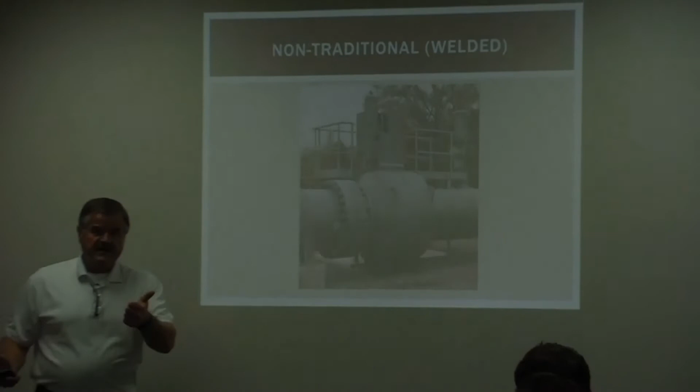I will tell you, we'll make that bolted body if you want one. But this one was put up with a big flange where they bolted the valve into the line. So even though you prefer to bury welded valves and keep bolted valves above grade, it's not always the case. Sometimes it's availability, sometimes it's price, sometimes it's other factors involved in what you can do to build a pipeline.

Another way, this was an elbow that comes in and makes a 90-degree turn. I love the way they built that platform. The guy has to go out and work on that actuator. Makes all the difference in the world. He can climb right up there and do all the work he needs to do.

But that's above ground. That's at a compressor station over in Arkansas. That was the Fayetteville Express pipeline that was put on that.

So, welded versus bolted. A bolted body valve is field repairable. I can take this valve apart and fix it. Welded body, I can't do that, I can't cut it apart in the field. A welded body offers fewer leak paths because I've got O-rings and seals and everything in here. When people bury it in the ground, they don't want to take a chance on a leak, so that's why they decide to go with the all-welded body.

Bolted body, this is a flanged end valve, right? This is a flange. On the bolted body, I can replace the flange and put a weld flange on here, so I can change the valve over and do different things with it. I can't do that on a welded together body because I can't cut the valve apart and do that type of work to it.

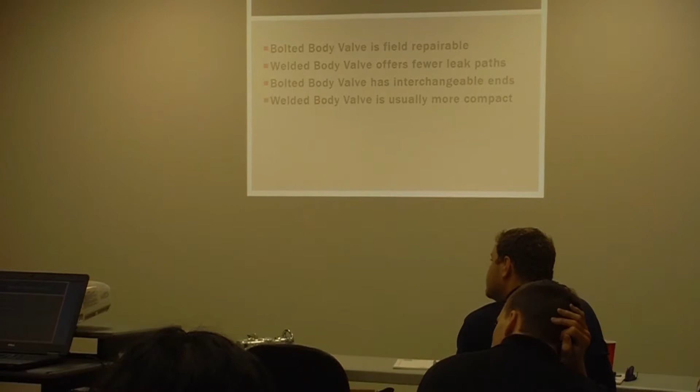Welded body is usually more compact. Sometimes when they put this body together, it's a little more compact. Your takeout distance is the same. I don't know, did you talk about ANSI standards on takeouts?

The bolted body is traditionally used above grade, we talked about that, and the welded body is traditionally used below grade. The internal construction is the same for both. On the trunnion mounted ball valve, this would be identical for most manufacturers, and operating torques are nearly identical.

So when you size actuation for the valves, most of the actuation companies, John, you can correct me on this, never ask whether or not the valve was a bolted body or welded body. All you want to know is pressure class and the diameter of the valve so you can size the actuator for it. Yeah, well, we ask what valve it is, typically, because that specifically will tell you the torques. So really it doesn't matter as far as actuation sizing for a trunnion mounted ball valve, whether it's bolted body or welded body, it's kind of irrelevant.

Both styles can be automated. You can add actuation and everything to them.

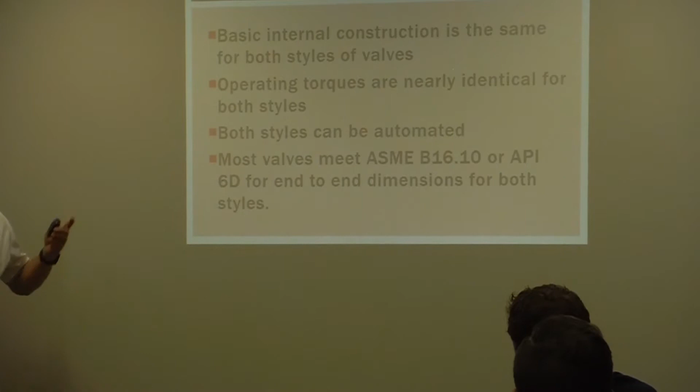Most valves meet ASME B16.10 or API 6D. ASME is the American Society of Mechanical Engineers. We're talking about the B16.10 standard on every flange valve from about half inch up through 24 inch. This end-to-end dimension on raised face valves is identical for every manufacturer, from about half inch up through 24 inch. So if you buy my valve, put it in your pipeline between flanges, and then ten years from now you have to buy a company XYZ valve, you can take mine out, put theirs right back in, and everything fits.

Again, another industry standard is what we call a takeout. The takeout dimension is this dimension here between the ends of the valve on a flange end. On a weld-in valve, it's not that way because you're welding pipe, so you don't care, you'll cut the pipe to make the valve fit. But on a flanged-in valve, that is a standard, up to 24 inch. After 24 inch, for the larger sizes, it's called API 6D, and those dimensions are also fixed.

Again, flanged-in valves only. So whoever's you buy, if you put a valve in there today and you have your piping fixed with flanges on both sides, pull one out, put another one in there, doesn't matter the manufacturer, they fit. Another industry standard that we have. Okay? Questions on that? That's ASME B16.10.

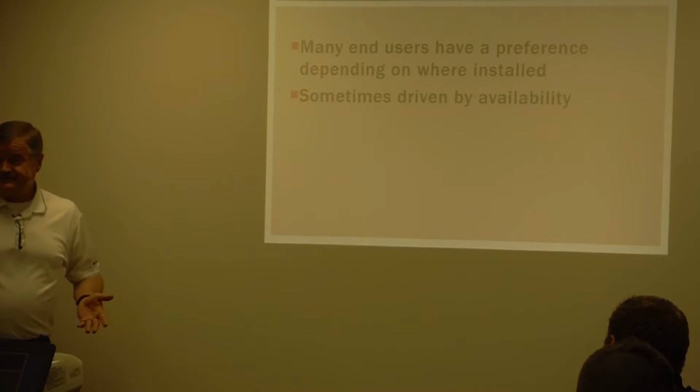Again, I talked earlier, availability. I need a 30-inch 600 valve, and I need it in 2 weeks. Yeah. Guess what? I have a bolted body. Okay, well, that's all I can find. Send it to me. That happens. We get a lot of that. Okay. Most people use a variation. Some people, just availability, pricing, stock, project. It just depends on a lot of variable factors. And both styles have been used in every type of application you've got out there.

Okay. Most manufacturers make both styles, welded body, bolted body. Many of them choose a style depending on application, availability, pricing. Major difference is the bolted body is field repairable. It can be repaired. And similar in internals and everything, okay? Any questions on that? Everybody pretty cool on that? Which one's more expensive?

Depending on the manufacturer, for us, there's very little price difference between the two. Some manufacturers, a bolted body is sometimes a little less expensive because you have less parts. Remember, you got bolts and studs and nuts and all that to put together. On a welded body, you just stick metal together and weld it up. So it depends on the manufacturer. You got to pay a welder though. Yeah, you got to pay a welder. So for us, quite frankly, there's really not much difference at all in price. Some manufacturers make a difference in price.

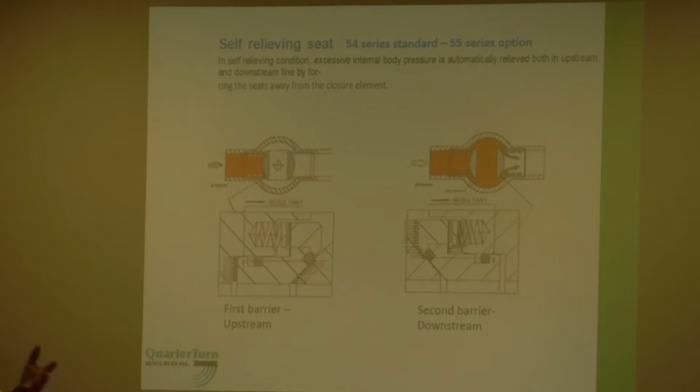We're going to get into double block. Okay. What we're talking about is a double piston effect seat. Are y'all familiar? I talked about the self-relieving, where internally the slab gate valve, if you overpressure the body in the closed position, it will burp or self-relieve to one side or the other. That's self-relieving. There's one particular company that's their standard. This is a design philosophy that many manufacturers have had. First and foremost, we offer both designs, a self-relieving seat or a double piston effect seat.

What happens is when you have pipeline pressure that goes into the valve, when you open the valve, not only does the pressure flow through the valve, but it flows through the body of the valve. There's got to be room in there for the ball to turn, so there's the body that exists, internals of the valve, between the ball and the walls of the valve. That's called the cavity, where the ball's got room to work. But when you close the valve, this seat in the downstream area closes off. This body pressure is still trapped in the valve.

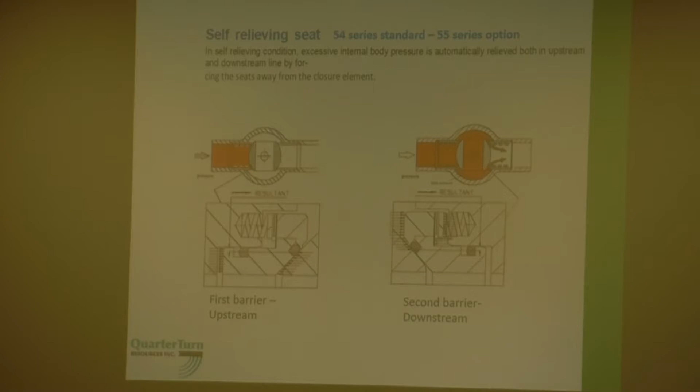Remember, you had gas flowing through there, so as you open and close the valve, see, this body cavity is exposed right here, so it fills up with pressure. Now I close off the valve, and now I've closed off the flow stream, but guess what? What's inside the ball and what's in this cavity is trapped pressure. So I always have to be aware it's there.

That's why if you ever ship a valve back to a manufacturer for repairs, ship it in the open position, because quite frankly, if you ship it to us in the closed position, we're going to turn the truck around and send it right back to you, because I have no idea what's in there, and I'm not going to take a chance on one of my employees opening that valve and something blowing out of it. So I always make sure. But on the double block, on the trunnion mounted ball valve, there's another way to do that. We'll cover that here in a minute.

But what happens is, it's called self-relieving. Think about the seat self-relieving. The seat design is, the valve's sitting there, and as your downstream pressure drops in the closed position, the seat realizes this pressure is going down, and it automatically starts to relieve this pressure out of the cavity.

And it will block off, and when that body cavity pressure, for the most part, is relieved, all your pressure is held behind that seat on the upstream side. That's called a self-relieving seat. Sometimes people will refer to that as a ball valve that'll burp. If anybody ever talks to you and says, do your seats burp? It's old school talk.

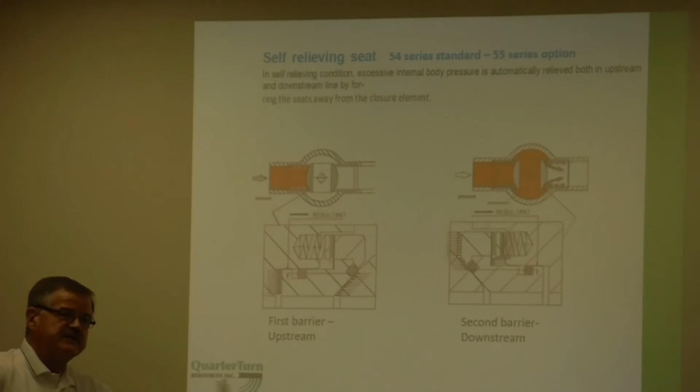Yeah. But what happens is, this doesn't usually relieve just like that. It'll sit there and relieve a little bit. It'll stop, and as the pipeline pressure drops, it'll relieve a little bit more. It never completely relieves; it'll maintain a little bit of pressure. But by and large, most of your pressure will relieve. It's called a self-relieving seat. It's a good thing that you don't have to maintain the pressure in its cavity. All your pressure is still maintained in the pipeline.

That's a good thing. The bad thing is, suppose this valve, now that you've closed it off and the seat's relieved, suppose this upstream seat leaks and doesn't seal off. What happens now? This upstream seat has a minor leak. Pressure builds up, it leaks into this cavity again, and what happens to your downstream seat? It wants to relieve that pressure. So I have a leaking valve. There's not much you can do to fix that by design. Okay? So now you have a problem. That's called a self-relieving seat. Back to the other picture.

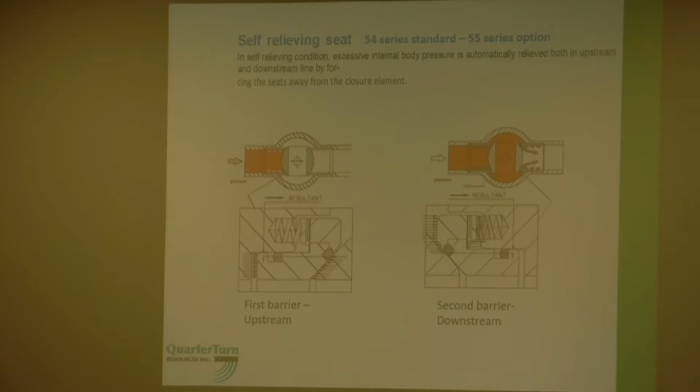Now, a double piston effect seat works in a little different manner. Again, as the pressure builds, you open and close the valve, your body pressure builds up in the cavity on a double piston effect. The reason they call it that is because we're doubly sealing the valve. When you close the valve, I don't have a self-relieving seat, so this pressure does not leave the body cavity. It stays there. You might say, well, why would you need that? Number one, remember the scenario I gave you: if the valve's closed and you have a leaking seat on the upstream side, this seat doesn't relieve, it holds the pressure, so in effect I have a double sealing capacity on that valve.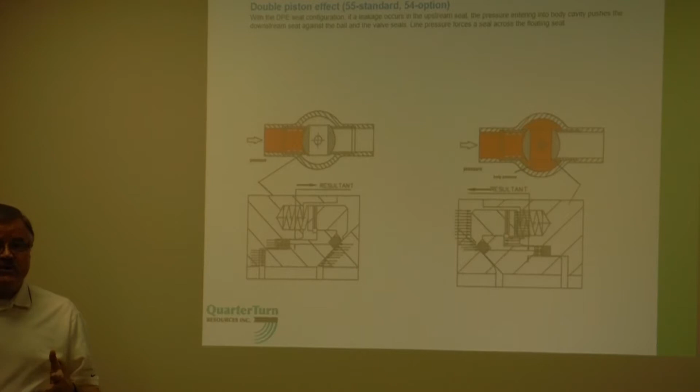Secondly, I don't know if any of you have ever been involved in an application on a valve in front of a pig launcher. There is a rule under API that says you need to have a double seal in front of pig launchers, because when you open the door to the pig launcher to put that pig in there, the only thing maintaining the pressure in that downstream pipeline is that valve in front of it. So this makes a lot better sense. Now I have double seats to make sure that valve doesn't leak back into the pig launcher or receiver, the one where you take the pig out.

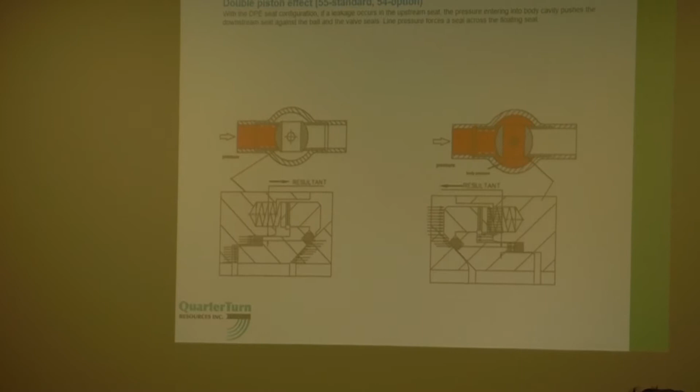Double piston effect seats for a lot of manufacturers is an upcharge. They charge you extra because it makes a difference. This drawing down here shows you how the pressure energizes the seats. But in a nutshell, there's a difference between DPE seats and self-relieving seats. DPE seats are usually more expensive from most manufacturers. We standardize on this, and that's mostly what you use in your gas system. Almost all your specifications mandate DPE. But not in liquids. Any question about DPE seats versus self-relieving seats? Everybody understand that? Okay.

And one more. We're almost at the end, folks, so bear with me, everybody stay awake.

A valve with two seating surfaces. Remember, I have a trunnion-mounted ball valve. I have seats on both sides of the ball, right? They're spring energized and hold the seats tight against the ball. As the pressure builds in the pipeline, because of the way the seats are designed, the increased pressure pushes the seats even harder against the ball, giving you more sealing power. We provide blockage of flow from both valve ends when the cavity between the seating surfaces is vented or drained.

So my ball valve is in the closed position. Here we're closed. Everything's blocked off, right? But we know I've got pressure in the hole in the ball, and I've got pressure in this cavity, the room that allows the ball to turn. So the question is, how do I get that pressure out of that valve and not drain one or both ends of the pipeline? How do I do that? Very simple. In the bottom of every trunnion-mounted ball valve, though this one doesn't really have it, is a plug.

Just a great big threaded hole with a plug in it. When you buy the valve from us, we put a piece of pipe and a little elbow, and out here, about a foot or so away from the bottom of the valve, we mount a small ball valve. So what happens is that when pressure in here is trapped, you can go down and open up this valve with the valve in the closed position, and you can drain all this pressure out of the cavity around the ball.

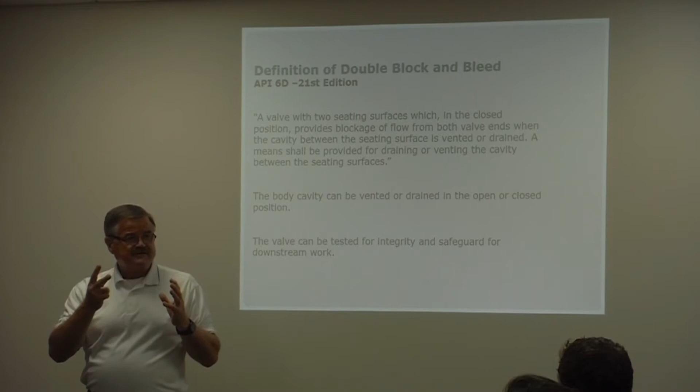So guess what I've done? I got two seats, right? I have double blocked the flow with the seat on both sides. I blocked the flow from the downstream side. I blocked the flow from the upstream side because the valve's closed. And now I have bled off my pressure. So I've double blocked and bled the valve. Does that make sense? Double block and bleed.

Another thing it tells me is when I open that valve at the bottom and the valve is in the closed position, you'll hear the gas blowing out, and eventually you'll hear it slow down. And if the valve is good, it'll stop. But if I open that and I keep having blowing coming out, what's wrong? I've got a seat leaking somewhere. But if I got pressure on both sides, we don't really know if it's upstream or downstream. But I'm losing pressure.

So I can go out with this valve, close the valve, if I can shut down the line, and open the bleed valve, and find out my seats are good, right? If you're going to do repair work downstream of this valve, wouldn't the maintenance guys really appreciate it if they found out the valve's going to hold pressure before they go out there and start working on the pipeline?

Of course they would. And if you have one of these in your yard that hasn't been used and you want us to check it, you know what we do? Close the valve, and at the bottom we'll hook up an air line and pressurize it from that way. It's called an inside-out test. We'll pressurize the cavity while the valve's closed and put a gauge on it, and if it holds pressure, your seats are good. We just reverse what you normally do with the pipeline.

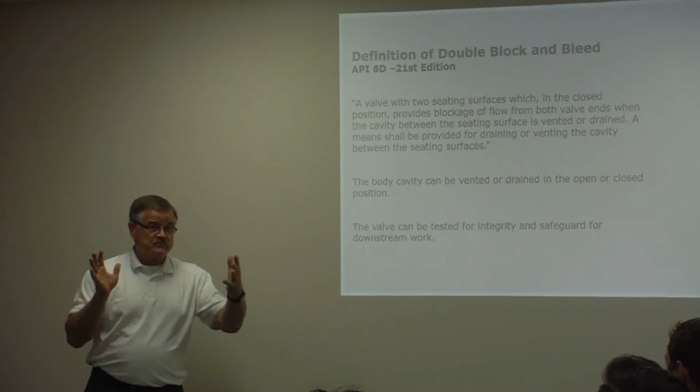Well, I said the pipeline under pressure. You can do that too with testing your own valves. So, everybody understand, double block and bleed is not complicated. Double block and I bled pressure. Can you explain the difference between DIB1 and DIB2?

Hey, you were complaining about not enough questions, so here we go. I'm just glad you asked it. That's all you, go ahead. Let me go get Rudy Garza. Yeah, go get the guy that wrote that.

Dual directional seats and single directional seats. Yeah, that is it in a nutshell. It's where you put your pressure in the particular application, whether you want your upstream seat relieving or your downstream seat relieving. Go back a slide. But DIB one is here.

DIB one is double piston effect, which is what we provide in most of your applications in gas transmission. Like he was saying, if it burps downstream and you've got guys working downstream of that, like on a pig launcher, you don't want it burping downstream. But in thermal bypass applications where you want it to relieve upstream, you put a self-relieving seat upstream and a DPE seat downstream. That's a DIB two.

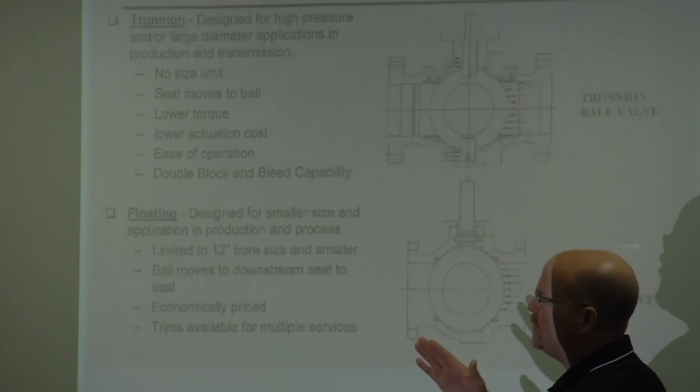Yeah, it's called inside out test. You load up pressure on one end, isolate the body, load up pressure on the other end, or pressure in here, relieving this. It's simply a factor of how you test that to get to that end.

Right, okay, and you achieve it by DPE and a self-relieving seat. So DIB-1, both sides. If you had double piston effect seats, as we talked about, you're a DIB-1 valve because I've got pressure blocked on both ends. DIB-2 would be where I would. We sell valves to customers, we do a lot of this in liquid. We sell a lot of ball valves in liquid applications besides gate valves.

The reason, a lot of times what he's talking about is when you want to shut that valve, you know yourself, it's a liquid, it's not compressible. If this valve starts to get hot, that pressure's got to go somewhere, right? With gas, we're infinitely compressible with natural gas, we don't care. But I'll have a thermal bypass installed, which is we have a vent at the top of the valve, and we'll tube that back over to either your pipeline or the pipe nipple or to the flange, to the upstream side, because you want to relieve that excess pressure back into the pipeline. You don't want to relieve it downstream of whatever else you're doing. So that would be a DIB-2 setup.

And that pressure that you're relieving onto the upstream side has to overcome the pressure inside the vessel. It has to be a higher pressure than what's in the pipeline upstream before it will relieve into that, because it usually uses a relieving valve, a small one, that's in there, and your pipeline pressure is plumbed into that. So if your upstream pressure is, say, 800 PSI, that body cavity is not going to vent back into that pipeline until it exceeds that 800 PSI. So it has to be like 801.

Most of the pipeline valves in Europe are all metal, just as a side note. They don't use a lot of resiliency, not at all. It's just their philosophy, I mean, it's just a difference in philosophy.

All right, so the body cavity can be vented or drained, and when I say in the open and closed position, that's for most manufacturers. There are some exceptions. And the valve can be tested for integrity and safeguard.

Again, double block and bleed, we're back to okay, how that works. So everybody now, if anybody asks you, is that a double block and bleed valve? You'll find out somebody knows what you're talking about, right? Now you understand, it's not complicated. Do you think it is? We double block and we bleed. There you go, double block and bleed.

Fire safe, okay, these are standards that are out there in valves today. Under simulated fire conditions, I watched one of these. They put natural gas burners around a valve, and they fill it with water, and then they light the fire, and they cook the valve.

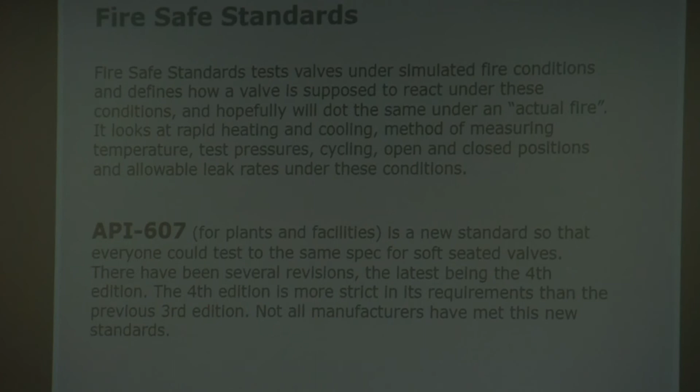And you see how long a valve can hold under fire conditions. Now don't you think that would be pretty important around a compressor station or something like that, or a pump station? If there was a fire at that pump station, how long is that valve going to hold pressure? Because you don't want it releasing and creating more issues. So the standard that's out here today is API 607. That's for plants and facilities. So a compressor plant would fit under API 607.

Make sense? That's a particular standard. Fourth edition is out there. There's been several revisions. This was a new one about 7 or 8 years ago, the API 607, when it came out. Not every manufacturer has done that particular testing.

Is it only API or NFPA code around the 607? Well, no, just with the fire protection on the valves. So with the fire safety on the valves, is there any NFPA codes, or is it all API? Usually all API. Everything's pretty much, except I'm going to give you an exception here.

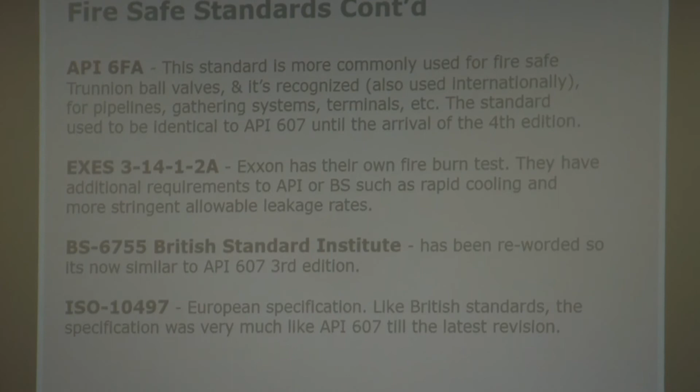6FA is a standard in trunnion ball valves. It's also international. This is for pipelines and gathering systems. A lot of times the ball valves will be stamped API 607/6FA. That means it meets both standards. Our valve does, API 607, API 6FA.

So you understand the difference. 607 is plants and facilities. 6FA is gathering systems and pipelines. I'm assuming plant facility is more stringent?

There's slight differences, variation. I think the burn time, I don't hold my feet to the fire, but I think the burn time on the 607 is a little bit longer than 6FA. I've experienced a 607 burn test and what they do. I don't know, I've never experienced a 6FA, but the 607 is they heat it, light the burners, burn it for a period of time, and then shut the burners off.

There's a time period, and then they hit it with water. When they hit it with water, they're trying to find those coefficients of expansion and what the leakage rate is to meet that. In 607, being inside a facility, you've got a refinery, and somebody's going to be putting water on it. So that may be the difference.

I'm not sure, I've never seen a 6FA test. I don't think I'm an expert on 607 and 6FA. I just know that we meet both standards, so we can do with that.

The next one is EXES 3-14. This actually came out March of '14, that's the reason they call it that. And this is the second edition, 2A. This is Exxon's. Exxon has their own standard for ball valves. Exxon has their own standards for everything, of course, trust me, they do.

When we see bids for Exxon, we're like, oh God, what do they want now? Because it's always something different. They have additional requirements, and this is what Kevin was talking about: rapid cooling, more stringent allowable leakage rates. Remember, metal expands when it gets hot.

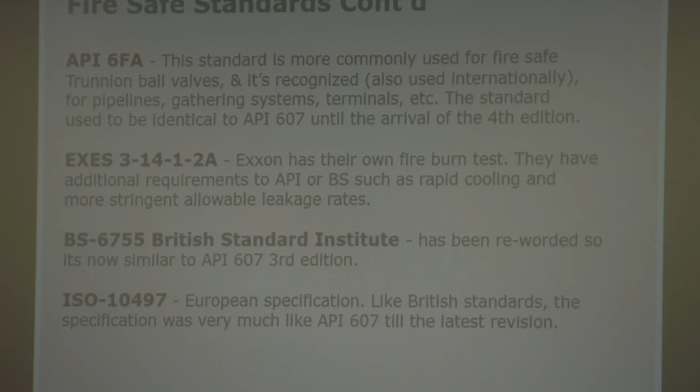When you hit it with rapid cooling, like you dump water on it, you're going to have this quick shrinkage. So they want to make sure that fire-safe seal in this valve can accommodate the coefficient between the materials and the sealing material that's in there. Years ago, we used to use asbestos for that. Of course, we don't use asbestos anymore for anything, so we use other materials, but that was pretty good.

That's good stuff. BS 6755 is a British standard. This used to be a big one for BP. They always had the British standard they used with that. It's been reworded, so API 607 3rd edition today is pretty standard.

And then ISO, if you're dealing with TC Energy, especially on the Canadian side, we get a lot of ISO standards. I'm sure you guys see that on some of your projects. It's a European spec, like the British standard specification, very much like API 607.

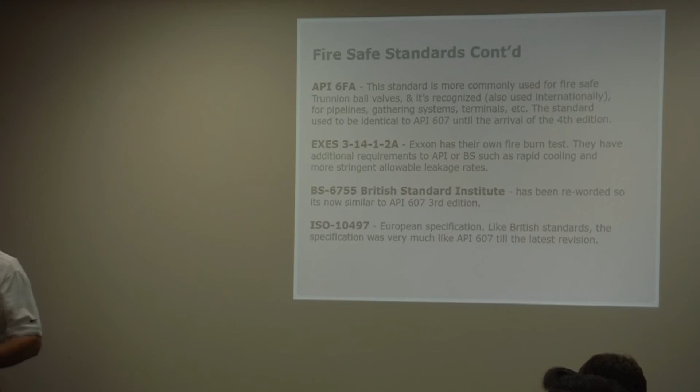Everyone here is US, so there might be a few Canadian trying to separate, and they're still going through some of that. You'll see some Canadian specs on some stuff, but for the most part, API's fine. This ISO spec basically adopted the 607 5th edition.

With all of waterways, Coast Guard, anything near water, the Coast Guard can't spell or use API 607 properly in a sentence, but they know this ISO standard, and they know those numbers by heart. So if you're dealing with interstate pipelines and having to cross a waterway, that's the number the government, the U.S. government's going to come at you now with, the ISO.

The API basically absorbed it, but they don't know that. They're box checkers. It's like, does it meet the standard? Well, it meets API 607 5th edition. Does it meet ISO? Yes. I was previously at a marine terminal, so everything was ISO.

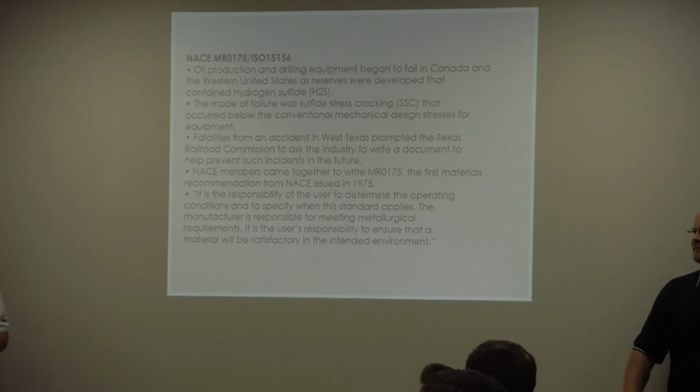Who knows what NACE stands for?

National Association of Corrosion Engineers.

This was a standard, and the MR0175 was pretty simple. Do you know where they came up with MR0175? The very first meeting of the engineers was in late 1974, and in January of 1975, they adopted their first standard, MR0175. Of course, this has been exceeded now—there are newer versions out there, but that was the very first one.

What we're looking for is H2S contamination in natural gas, hydrogen sulfide. Years ago, hydrogen sulfide was bad news for valves because in the manufacturing process they used standard steel material, and when it was exposed to hydrogen sulfide, the valves would start to develop certain surface cracks on the interior of the valve.

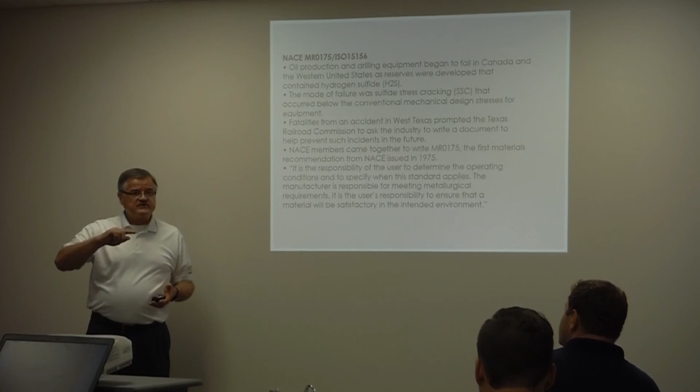So people found that out and said, well, what do we have to do to fix that? It was sulfide stress cracking, SSC. In an accident in West Texas, believe it or not, the Texas Railroad Commission asked the industry to write a document to help prevent such incidents. Back in the early 70s, they actually had an explosion, and it was traced back to corrosion within the valve from the hydrogen sulfide.

Hydrogen sulfide, for a lot of you, is also called sour gas. I'm sure most of you have heard of sour gas—that's what that is, an excessive amount of hydrogen sulfide. So they came together and wrote the first MR0175, covering manufacturer responsibility for meeting metallurgical requirements and user responsibility for material use to satisfy the intended requirement.

I will say this: from us, and quite frankly most every other manufacturer out there today, the valve is NACE standard. That means the valve will handle sour gas as well as sweet gas, so it's not a problem. It'll be stamped on the nameplate of the valve that says NACE, N-A-C-E. If you look at a valve and it doesn't have that on there, don't put it in sour gas—it's not a NACE compliant valve. That's how this all came about with NACE compliance.